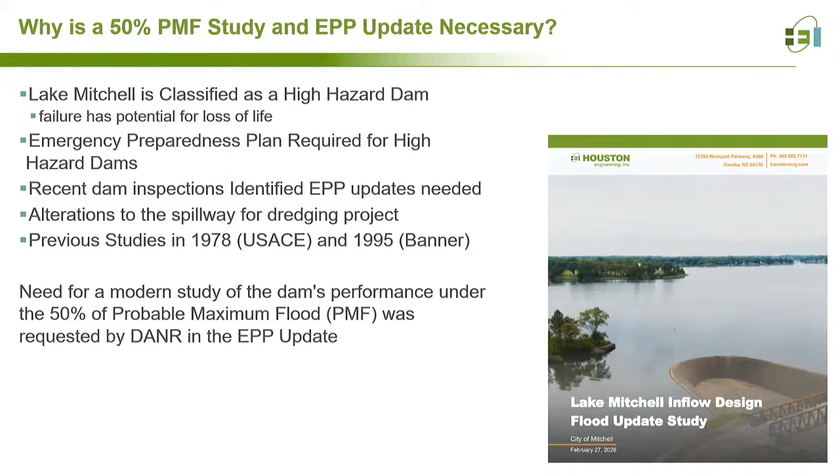And that really is what Houston Engineering was hired to do by the city: look at that 50% PMF performance of the dam as a state requirement, and also update that emergency preparedness plan.

As we got into doing that work, we quickly identified there may be some hurdles in showing that the lake may not meet those state standards for being able to pass the 50% PMF. At that time we started to develop the right analysis that would get all the different approvals needed at the state level to show that the dam is still going to be in good condition.

It just takes a little bit of an extra look at all the different inputs that go into assessing the risk of the structure if it were to be loaded by one of these really, really extreme events.

So the updates that Houston went through included looking at updated soils data, updated elevation data, and land cover across the Firesteel Creek watershed, which spans 3 counties, then using all of that updated land cover information to apply new modern rainfall standards, implemented in a 2-dimensional rain-on-grid model, which is a standard of practice in hydrology and hydraulic modeling of large watersheds like Firesteel Creek.

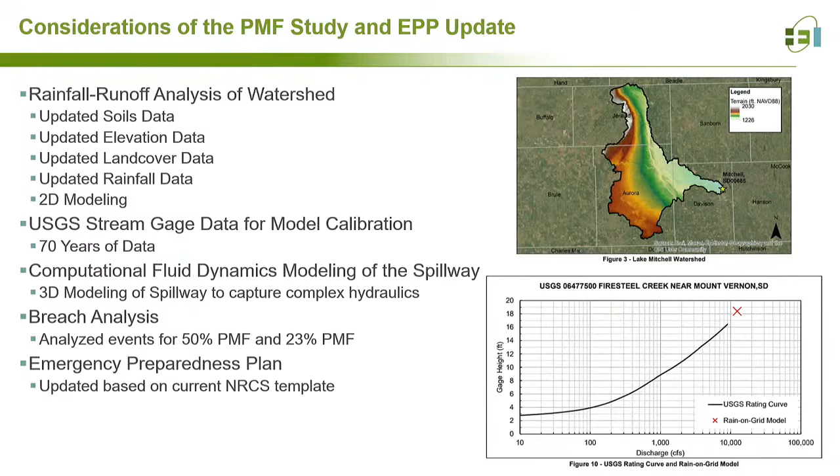But then one extra threshold that is looked at for dams is looking at how evacuation response would take place if the structure were to have an unlikely failure condition, and evacuations needed to take place. We're able to look at the breach that would exit the reservoir and then create the necessary maps so emergency managers can have those on hand should that unlikely event ever occur. That is really the foundation of updating that emergency preparedness plan, which is in progress.

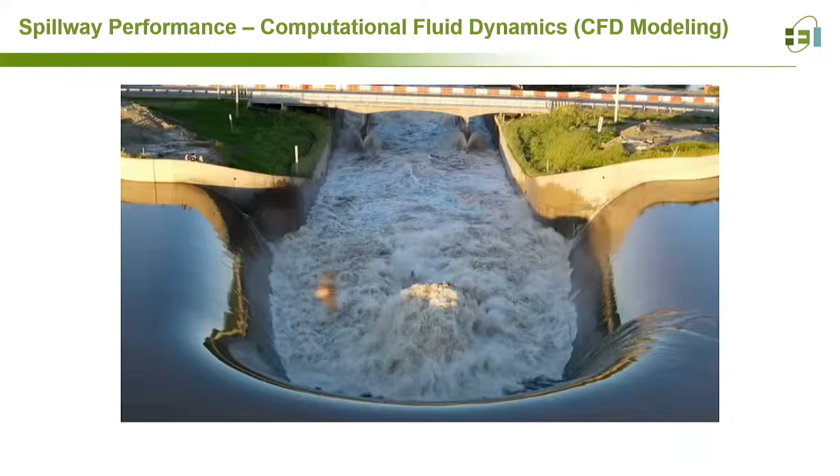So here's just a few photos, and there's some nice drone footage a resident was able to collect that shows what that spillway looks like under normal, high flow operating conditions. And then this is a rendering of the results of that computational fluid dynamics modeling.

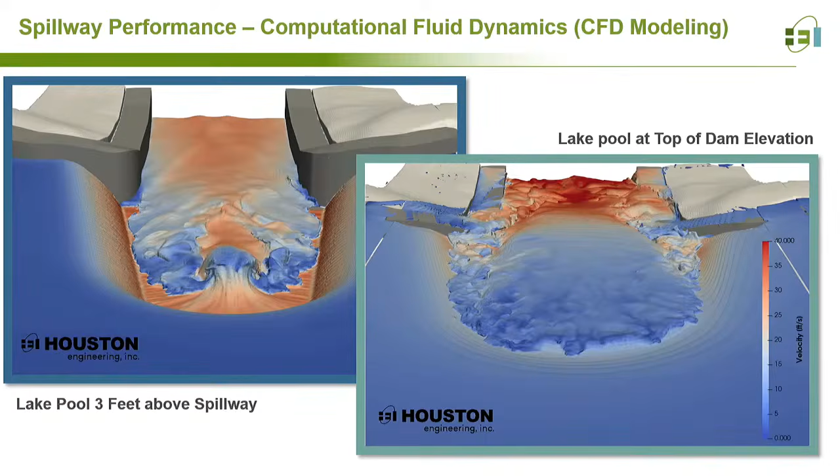You can see that central kind of jump, the rooster tail jump, really shows up well in the model. And then on the other side of the screen, you can see what it would look like when flows are at the top of dam, and from that we're able to get the data that we needed to know how the dam would perform under that condition.

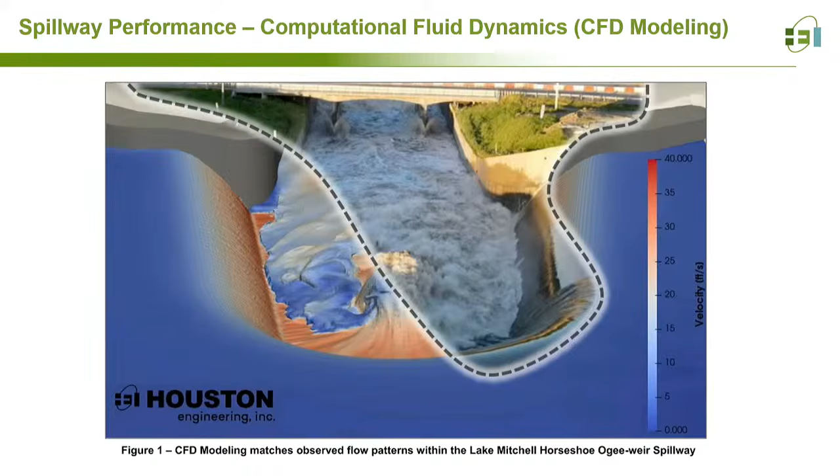And this just shows how those two things layer on top of each other. I think the picture really tells the story that the analysis matches almost photorealistically what was seen out there. So it gives us a lot of confidence that the results are good and can be trusted.

Can we ask questions as we go along? Of course. Can you go back to that picture? So is one of the things that you're looking at is, because we've had some epic rainfalls in the last 10 years, my question is, are you looking at how quickly the rain is falling, or how it makes it so that it's coming faster than usual? Or can you tell us kind of what that is? Sure. Looking at, do you understand my question? Yeah, your question's exactly right.

A big part of looking at how intense the flood event is, is a factor of the rainfall intensity. A 12-hour slow soaking rain that drops 4 inches of rain isn't going to create nearly the rapid rate of rise you'd see on the reservoir if you had 4 inches in 1 hour.

Part of what we do when we create the probable maximum flood is we use real creative naming - the probable maximum precipitation, which is just the rainfall side of that analysis, was applied to this reservoir using data out of a study completed for the state of Nebraska. That data extended across state lines up to Mitchell, so there was data available. Otherwise, the state of South Dakota doesn't have a study like that, and we'd have to rely on information from the 50s, which is not as modern and doesn't capture modern climate considerations.

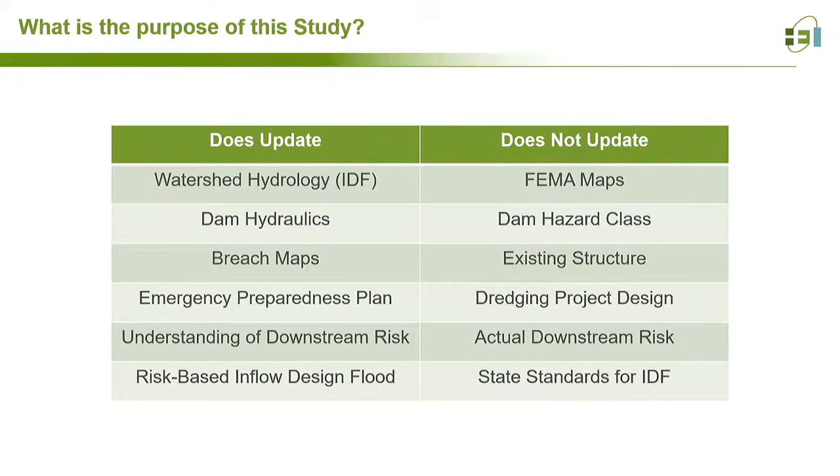So the real conclusion from the study, and I hinted at it already, is that the spillway doesn't pass 50% of PMF without overtopping the dam. It is able to pass up to 23% of PMF, so roughly half of that design standard is where Lake Mitchell is falling, and that really doesn't mean a lot when you say what's 23% of PMF, but...

It is still a very, very rare and unlikely event in itself, something that would be less than the 1,000-year event in terms of how frequently it could occur.

So picture the rainfalls that fell partially in the city of Mitchell back in 2024, but it was even worse over towards Sioux Falls and Sioux City - something like that on Lake Mitchell is probably still not quite getting to the level you would be looking at with 23% of PMF.

And then the final step of all of that analysis was, like I said earlier, doing that risk-based assessment, which involved following guidance out of a FEMA document, P94, Guidelines for Dam Safety. That's a federal guidance standard for performing what's called the incremental consequence analysis.

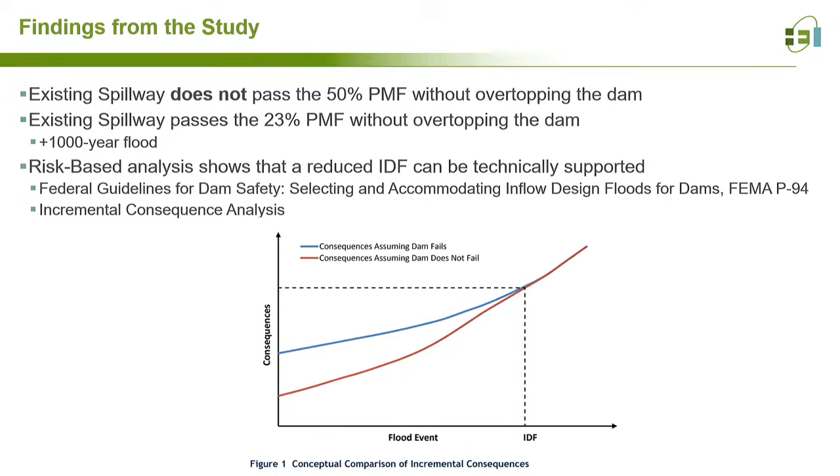And the next steps are well underway. I know there's been some news shared from the mayor, and some news stories about the request for variance and the public comment period. As those statutory requirements are stepped through, there will be a hearing next month in Pierre to take this variance through the state board that looks at these petitions and approves them. After that, there'd be qualifying requirements to keep the emergency preparedness plan up to date going forward.

That is all I've got, but I can take any other questions. So to make that simple, you're basically saying the results of the study were not bad. There's a pathway to addressing it. Yeah, they were not bad. Good, perfect. There we go.

So these, the rest of these steps that we're waiting for, what's the timeline on those? The public comment period, I believe, has started or is starting very soon. In May, there's a hearing scheduled. I believe that's early May, unless it gets delayed for some reason. It's May 6th, I think, right, Joe?

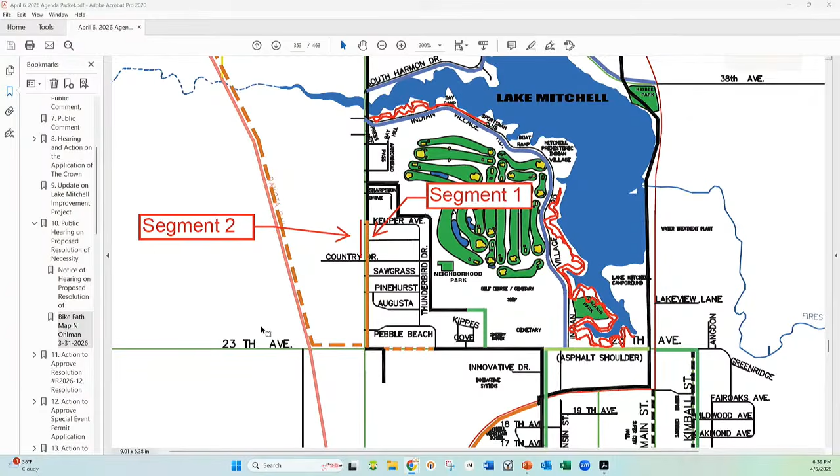That's along Ohlman. They'll just have to clean the sidewalk on the connecting side streets going through there. Okay, so with that, we will go into the two different segments that are on the resolution for public comment.

And then we will get into the actual resolution. So the first segment is from the 2300 to 2800 block of North Ohlman Street, just on the east side.

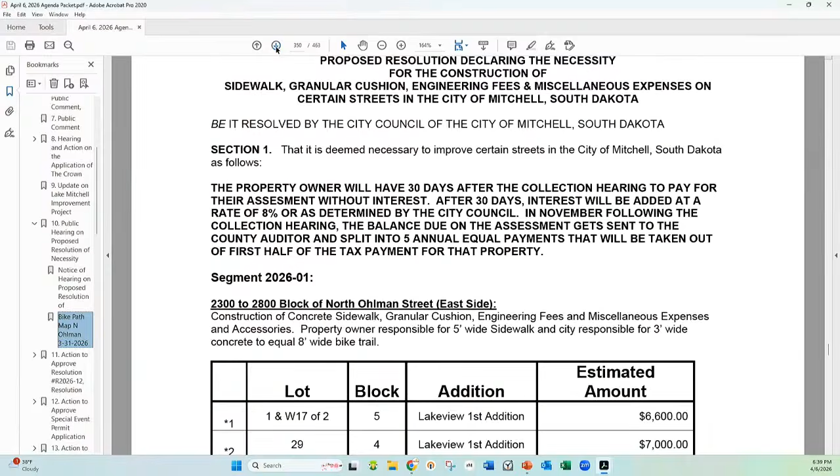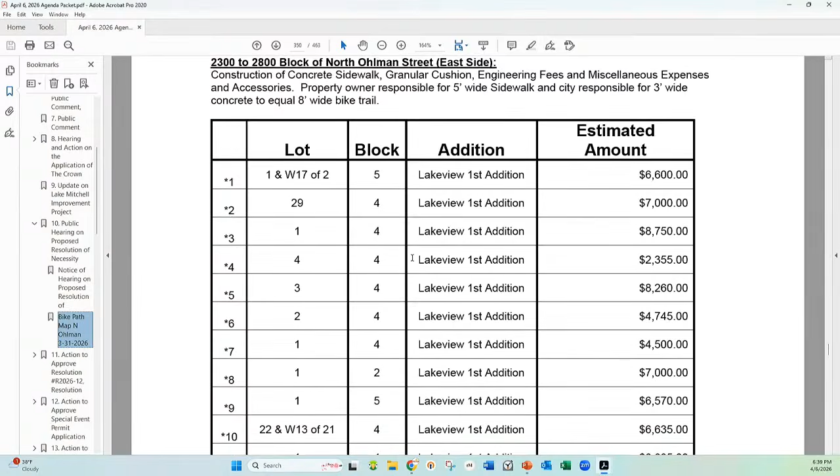That will be considered a bike trail or 8-foot wide sidewalk. The property owners would only be responsible for 5 feet of that 8 feet, and then the city would pay for the other 3. So with that, I will open it up to people that want to come up.

Please state your name and your address and your comments concerning the east side of the sidewalk. Would anyone like to come up and speak?

My name is Derek Gross. I'm at 1527 Pebble Beach Road, right on that corner there. I wanted to talk about the history of these bike trails that are getting added. It looked like the original ones were paid for with grant money. Is that correct? I could not find any records of this.

It looked like 2010 was assessed, and that's kind of what this decision was based on. And I can't remember which parts of these trails throughout town were added at what points in time, but it looked like originally the whole plan was to do this with extra grant money or funds that we had.

Maybe Joe knows the answer. So I'm not 100% sure on the history, but I do know the bike path going along the railroad tracks was in the county that the city chose to do. I'm not sure how it was paid for. The other bike paths located on city property were obviously paid for by the city.

What I would compare this project to is the sidewalk that we did on Raleigh and Norway, from Burr to Raleigh and from Norway to Cabela Drive. That sidewalk was assessed 5 feet to those property owners.

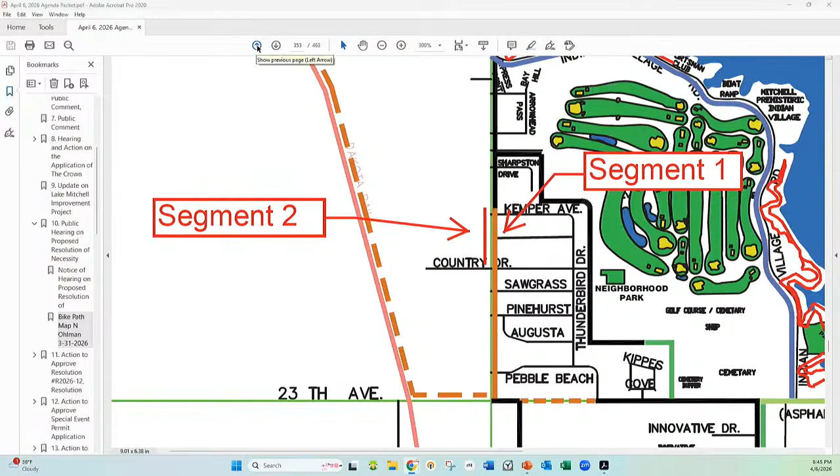All right, next stretch we will go into segment 2, which will be the west side of Ohlman. It would only be from Country Drive to the north end of the apartments on the west side of the road, basically at Kemper. We're connecting the idea of connecting the sidewalks that are on Country Drive and having a sidewalk on the west side that would connect to the apartments.

So that stretch is open to public comment. If you want to come up and comment in that area, go ahead and welcome.

My name's Tanner Music, part owner of Music Properties, and I guess that whole stretch would be my responsibility. But I don't see any reason to have a sidewalk that goes nowhere north, goes nowhere south. I understand a lot of places in Mitchell you want it where houses are, but in this instance, going north or south, it would just be a dead end. So I highly recommend not, just because it has nowhere to go and has no real meaning. Thank you.

Yeah, so there's existing sidewalk on Country Drive right now. So we would basically start right here, and go to the north end, up to the north end of the apartments.

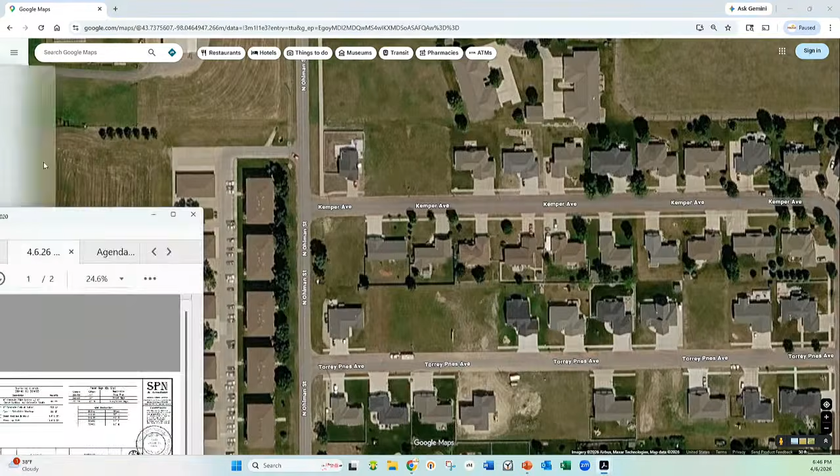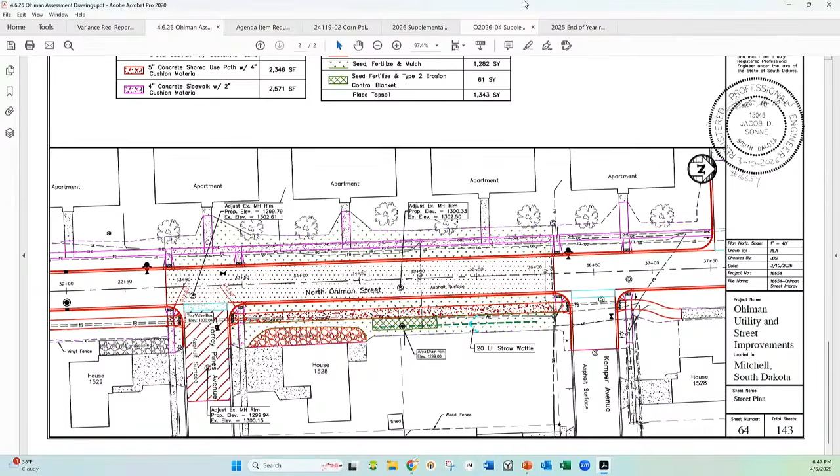So with that, is there any other public comment? If not, we'll just go right into the resolution. So this is the council's time to ask more questions. And what I would suggest is having a motion on each segment. Segment 1 and segment 2? Yeah, and you could do them separate. So are there any questions about segment 1, the bike trail on the east side of Ohlman?

Any questions on the east side? Move to approve segment 1. Second. Motion by Mr. Goldhammer, second by Mrs. Sharks.

Further discussion? Any other questions? Joe, on that spot or that stretch that you talked about on the south side of town, was any of that in county, or is that all in the city? That was all in the city. There was some right of way through the interstate that we dealt with, but all of that was in the city.

Okay, and that was also an 8-foot, of which it was divided out. We had an 8-foot and a 10-foot, which only 5 of that was assessed to the property owner, and then the city picked up the remainder. So 3 foot on the 8-foot and 5 foot on the 10-foot. Okay, and we did that, was it within the last 2 years, wasn't it? Yeah, I want to say 2023 we wrapped it up, probably, if my memory serves me correct. Okay, and typical sidewalk in Mitchell, is it always 5 feet? Yeah, unless it is curbside, we require 7, but our boulevard sidewalk is 5 feet wide. Yes.

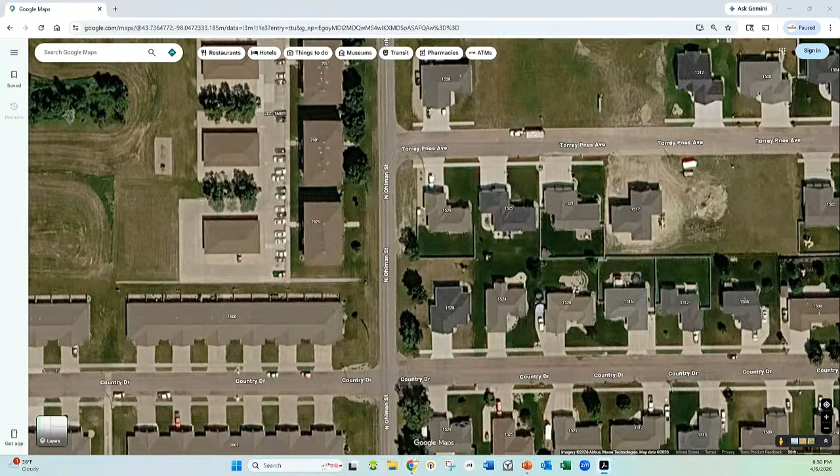The only thing I would suggest, if we had to modify it in any way, is to mainly do the Country Drive sidewalk, because you've got the end of the sidewalk at that driveway, and then for them to get to the bike trail, they're going to have to walk in the street and cross Ohlman Street to get to it. If we were to split it up, I'd be fine with just doing Country Drive, and at a later time we could do the apartments, if you felt the apartments to the north don't seem reasonable.

Yeah, and to follow up on Councilman Dosher's question, the rationale was that curb is being added and those apartments are within city limits. So per ordinance, we're required to show sidewalk at that location.

This brings me back to about four months ago when we allowed a couple of property owners not to do this exact thing. So why are we going to try and tell this guy he needs to do it?

Part of my thought here is that on the south side of that property, where the sidewalk juts out, we should have a sidewalk going south. That's a drainage area. Oh, never mind — I was thinking if we could figure out a way to connect the sidewalk that way.

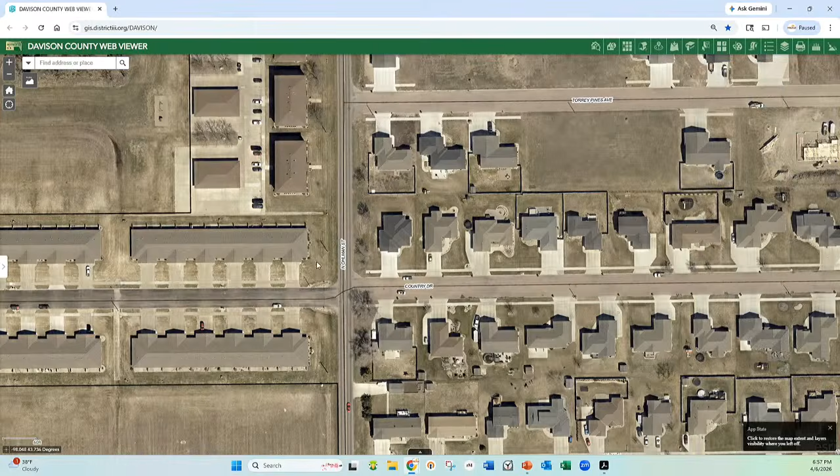I do believe there is a drain being installed. Correct, there's a drain being installed on the backside to catch water from that, so it wouldn't have flowed over the sidewalk as bad. So it'd catch the winter freeze-thaw water. And regardless if there's a sidewalk installed there or not, we would still put that drain in.

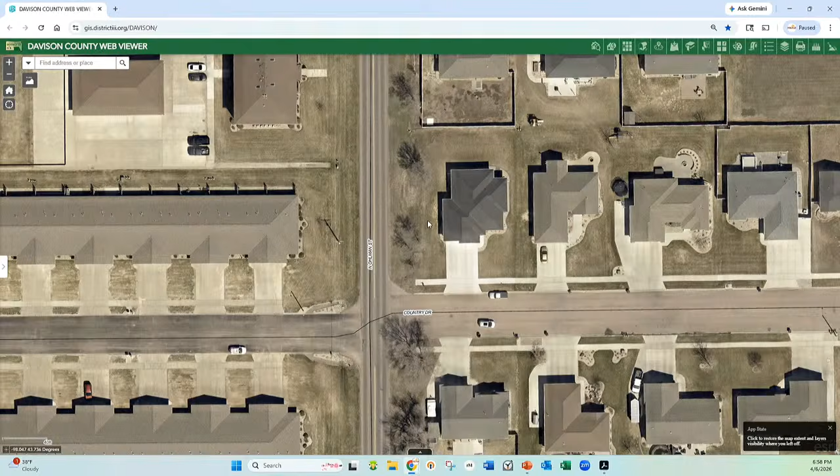I think you're talking about the cement portion - from right here, from this sidewalk, go to the road. From this sidewalk, go to the road. That's what we're talking about. I think Tim was bringing up - yeah, that's not a sidewalk, this is only like 3 foot, that's just a small drain, it's like a valley gutter.

Valley gutter, yep. I think Tim was trying to get people from your other complex to these other things. Right now, they'll have to go across grass to the ditch, the driveway the way they are now. Driveways as they are now, yeah.

Jeff McCormick: our design won't change whether you do the sidewalk or not. We've got it designed to plan where it's going to be for the drainage to come over the top of the sidewalk or grass, whatever it is. If there's an area we could not get it to go over where a future or current sidewalk would go, we brought an inlet back behind it, which is maybe at that one valley gutter that comes out there between the two of them. So our design won't change whether or not the sidewalk is going in or not.

So let me rephrase my motion - it would be that we do the Country Drive, and then add the caveat that if you ever decide to develop to the south, you would proceed with sidewalks at that point, all the way to 23rd.

Well, that's a big... I mean, there's 60 acres, you know. Like I said, I'm not going to develop one piece and then put a piece of sidewalk and develop another.

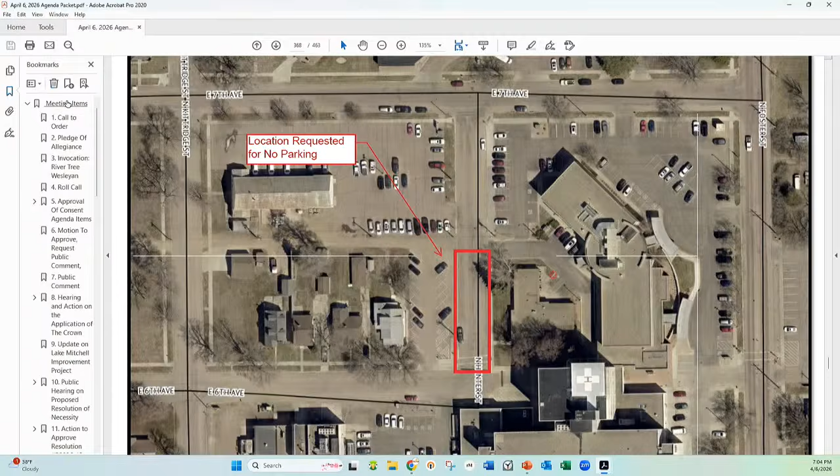Thank you. Move to approve. Motion by Mr. Goldhammer, second by Mr. Bethke. Further discussion?

Anyone in the audience like to discuss this? All those in favor of the motion say aye. Opposed, same sign. Motion carries. Action: award bid for ice arena roof replacement project 2025-24.

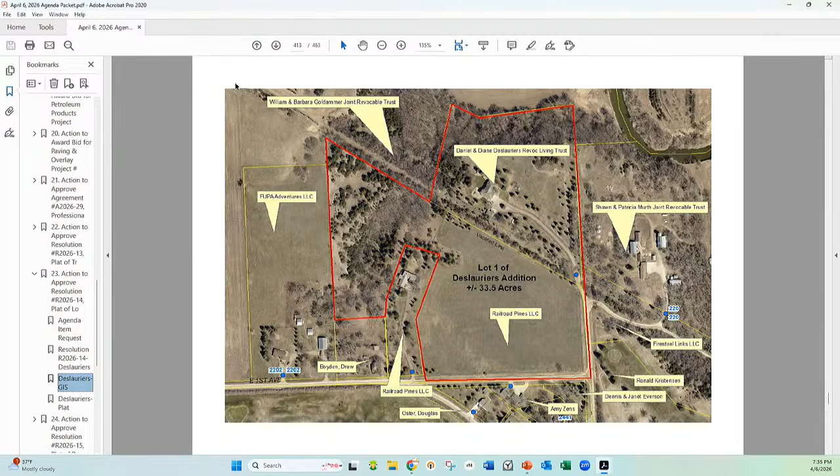Move to approve. Motion by Mrs. Starks, second by Mr. McCardle. Further discussion? Anyone in the audience like to discuss this? All those in favor say aye. Opposed, same sign. Motion carries.

Action to approve resolution R 2026-15 as shown on the agenda. Mr. Jenigas: Mr. Mayor and Council, Planning Commission recommended approval of this unanimously. A portion is outside city limits, so it'll have to go before the county as well, but it's in the ETJ, our zoning jurisdiction. We're going to treat these as H lots since they will go into right of way, so we don't need to require variances for the smaller lots. You'll notice there are only 3 corners of it. If this project gets fully approved, there will be an easement on the southwest corner with the existing landowner there. I can answer any questions.

Just to make sure the public is aware, there will not be any damage done to the lift station that was put in last summer - we're not going to have to move that. I'll let Joe answer that question. You are correct. Perfect, thank you.

Joe, another question. Where we had the old lift station right across the street, before we started talking about this project we were considering possibly selling that lot for a house. Now that we've got this in place, I'm assuming that's probably not feasible. Or is that something we could look at in the future?

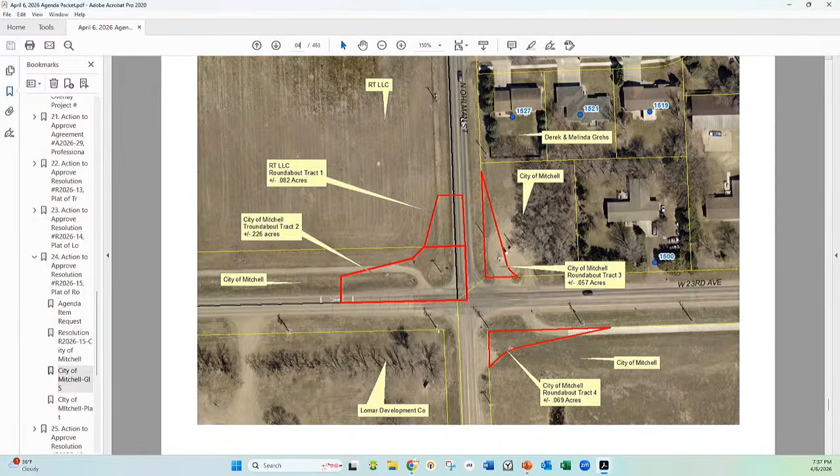I think it's something that could be discussed. A second option I've heard talked about is improving it so it's a trailhead, with a parking area so people can hop on the trails, because there's a lot of people parking bikes there right now, or vehicles so they can take their bikes out of town. So some type of alternative use to improve the area out there instead of just having a plain empty lot. Correct. Okay, perfect, thank you.

So I don't have one yet - move to approve. Motion by Mr. Goldhammer, second by Mr. Smith. Further discussion? Anyone in the audience like to discuss this? All those in favor say aye. Opposed, same sign. Motion carries.

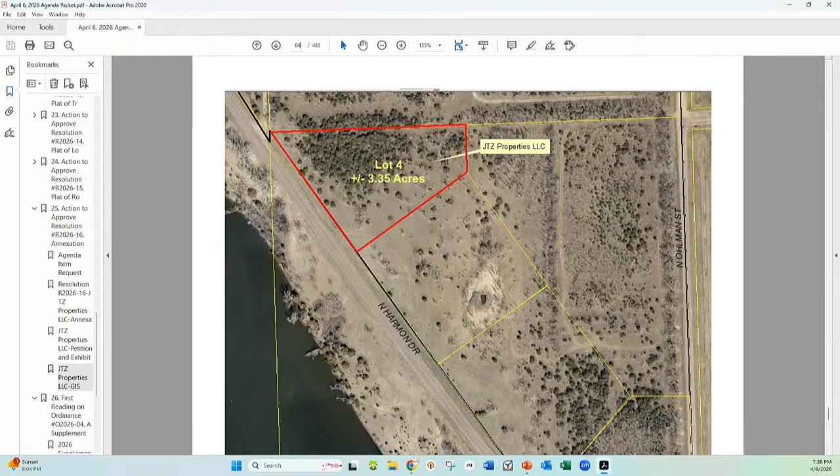Move to approve. Motion by Mr. Goldhammer, second by Mr. Sabers. Further discussion? Would anyone in the audience like to discuss this? All those in favor say aye. Opposed, same sign. Motion carries.

First reading on ordinance O 2026-04, a supplemental appropriation ordinance for fiscal year 2026. Ms. Elwine: Mayor and council, the information I'm going to go through tonight is also included on the agenda. It would be the first attachment that says supplemental appropriation budget final, in case anyone's following along at home. Just a couple things I would like to go through.

This first slide shows the type of supplements included in the 2026 supplemental budget appropriation. The total supplements are $56.8 million that I am recommending. Of those, 94%, or $53.4 million, are projects we started in 2025 that we're carrying forward to 2026. In addition, 4% of those supplements are due to cost increases after the budget was adopted, which is just about $2.6 million.

That does include the ice arena roof we just talked about, correct? It does, yes. The new budget request is about 1.4%, or just under $1 million. Then we have maintenance items at 0.1%, which is $58,000. We also had one item that was cut from the budget that was requested to be added back in for $8,750.

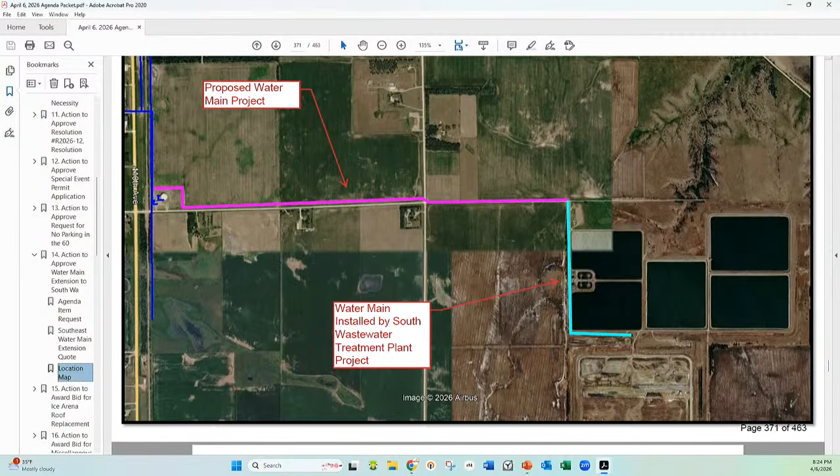Thank you. Move to approve. Motion by Mr. Goldhammer. Second by Mr. Barrington. Further discussion? Would anyone in the audience like to discuss this? Okay, all those in favor of the motion say aye. Aye. Opposed, same sign. Motion carries. We are adjourned.